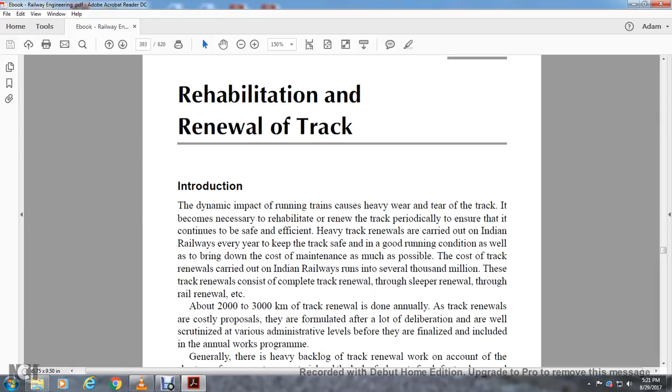These track renewals consist of complete track renewal, through sleeper renewal, and through rail renewal, covering about 2,000 to 3,000 kilometers of track renewal due annually. The cost proposal for track renewal is formulated after due deliberation and scrutiny at various administrative levels, before being finalized as part of the annual works program.

Generally, these heavy backlogs in track renewal work occur on account of shortage of permanent way material and lack of adequate funding for track renewal programs. Retaining an overaged track surface not only leads to increased cost of maintenance but also affects the safety and fluidity of traffic movement due to the delay in track renewals.

Incidents of rail fractures have been progressively increasing, and tracks have been placed under speed restrictions due to the ongoing backlog in track renewals.

Indian Railways is undertaking a massive program of track rehabilitation as part of the current plan. The backlog in track renewal will be completely cleared in the next few years.

Section 21.1: Classification of track renewal works.

Track renewal works are broadly classified as complete track renewal, which implies the renewal of all components of the track over a particular length. The necessary recoupment of ballast and provision of full ballast cushion is also done along with complete track renewal, or CTR.

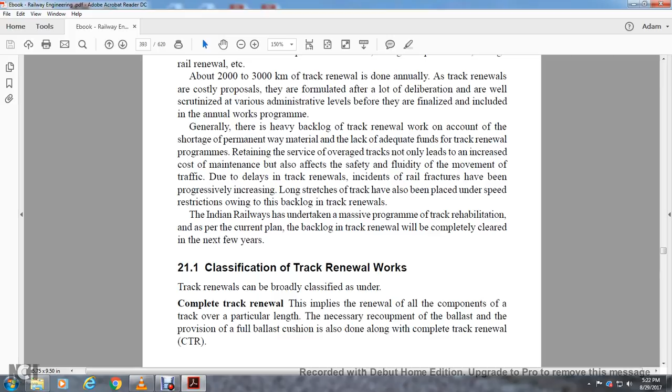Through rail renewal, or TRR, involves the renewal of all rails between one point and the next. Through sleeper renewal entails the renewal of the entire sleeper from one point to another. The necessary recoupment of ballast and provision of full ballast cushion is also done with thorough sleeper renewals.

Casual renewal implies the replacement and supply of some unserviceable rails or sleepers with serviceable rails, released rail sleepers, and similar types of items.

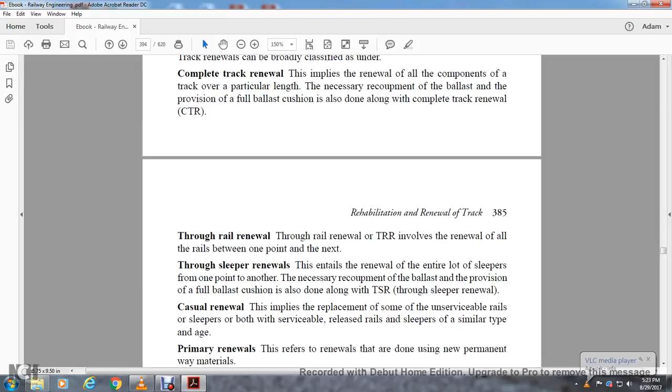Primary renewal refers to renewals done using new permanent way materials. Secondary renewal refers to renewals done using released serviceable permanent way material.

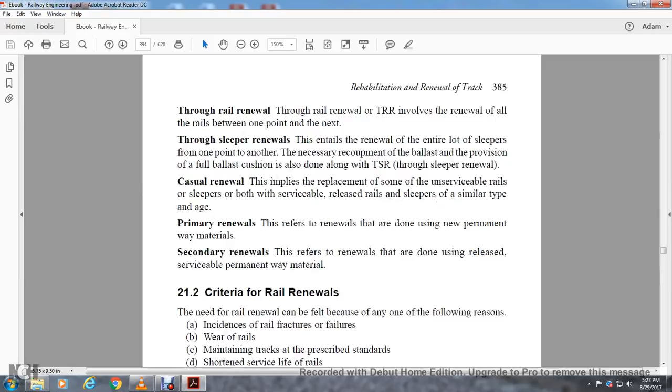Section 21.2: Criteria for rail renewal.

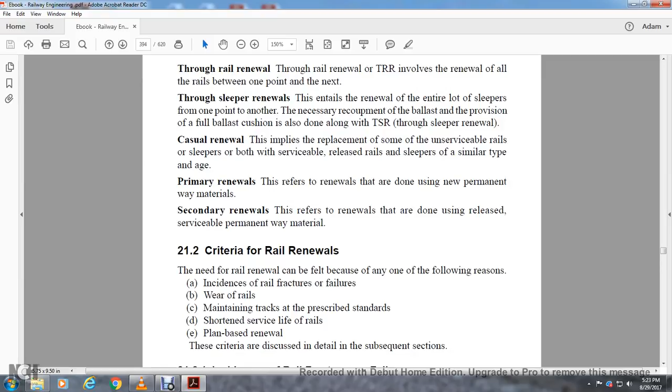Section 21.2.1: Incidents of rail fractures and failures. Since this factor has a direct bearing on safety, it should take precedence over other factors in deciding whether rail renewal is to be carried out.

A spate of rail fracture failures over a particular length of track may necessitate rail renewal. In such cases, ultrasonic testing of the rail should be carried out, and the section should be considered for rail renewal only if the fracture rate is higher than 4% in a year for a particular season, or 10% overall.

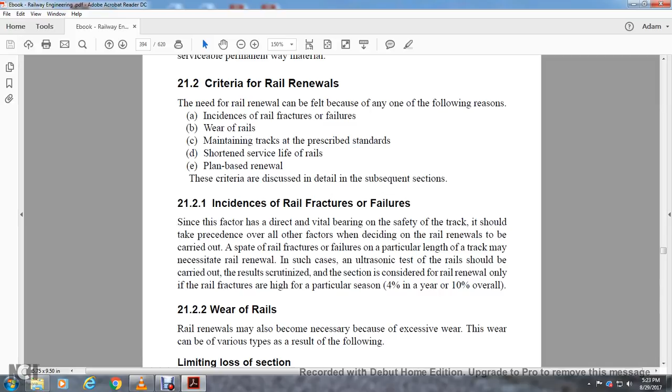Section 21.2.2: Wear of the rails. Rail renewal may also be necessary because of excessive wear, which can result from various types of wear.

Limiting loss of section: rail renewal may also be called for when the loss of rail section due to wear exceeds the prescribed limit given in Table 21.1.

In such cases, the rails shall be tested frequently using ultrasonic rail flaw detectors, because such rails are more prone to rail failures.

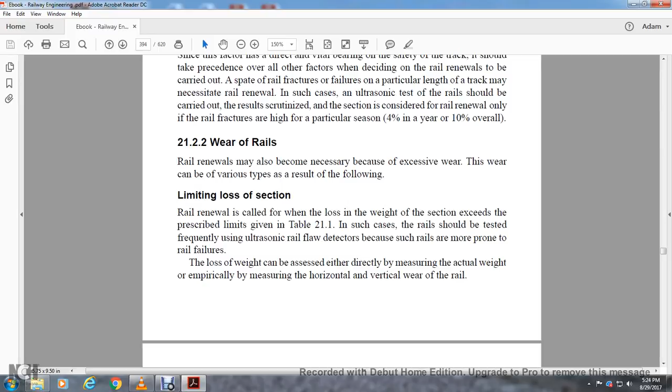The loss of section can be measured either directly as the actual weight, or empirically by measuring the horizontal and vertical wear of the rail. Table 21.1 gives the limiting loss of weight of rails.

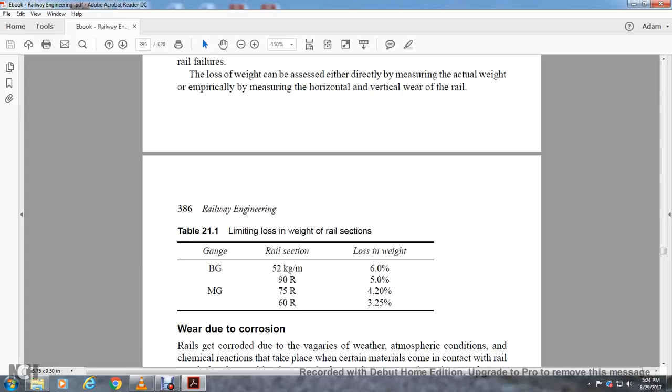For broad gauge rail sections: 52 kilogram per meter, 6.0%; 90R, 5%. For meter gauge: 75R, 4.20%; 60R, 3.25%. This is followed by wear due to corrosion.

Rails get corroded during varying weather and atmospheric conditions, as chemical reactions take place when certain materials come into contact with the rail metal, resulting in wear. Such wear is prominent in coastal areas.

Corrosion beyond 1.5 millimeters of the web or foot of the rail is specified as the criterion for rail renewal due to corrosion.

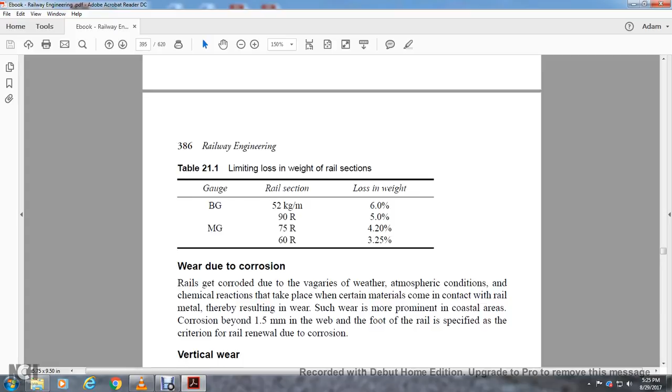Vertical wear, as shown in Figure 21.1, covers the reduction in depth of the rail head. Beyond the point where there is risk of wheel flange grazing the fishplate, rails should be renewed.

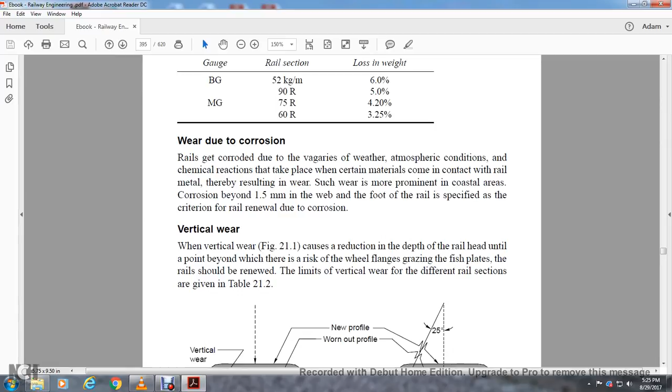The limits of vertical wear for different rail sections are given in Table 21.2. Figure 21.1 shows the vertical wear, centerline gauge face, new profile, worn-out profile, and the 25-degree vertical wear angle.

Lateral wear is measured at a distance of 13 to 15 millimeters below the top of the rail table.

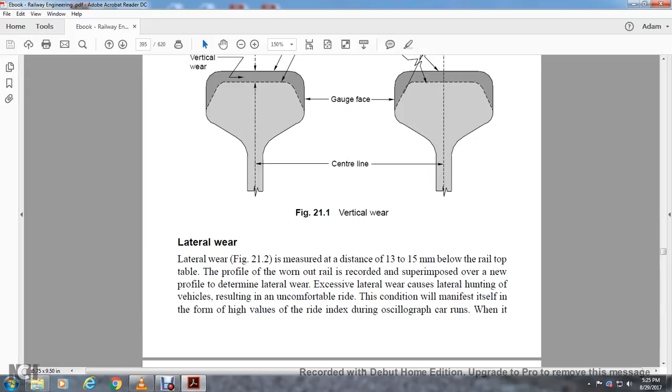The profile of the worn-out rail is superimposed over the new profile to determine the lateral wear, where excessive lateral wear causes lateral hunting of the vehicles, resulting in uncomfortable riding. This condition will manifest itself as a higher average ride index during oscillographic car runs.

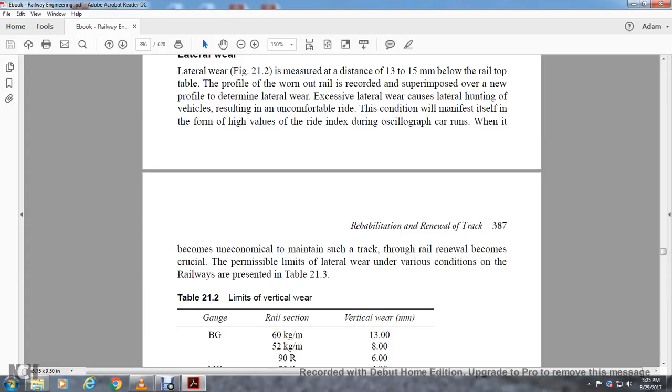When it becomes uneconomical to maintain such a track, rail renewal becomes crucial. The permissible limits of lateral wear for various conditions of rails are presented in table 21.3.

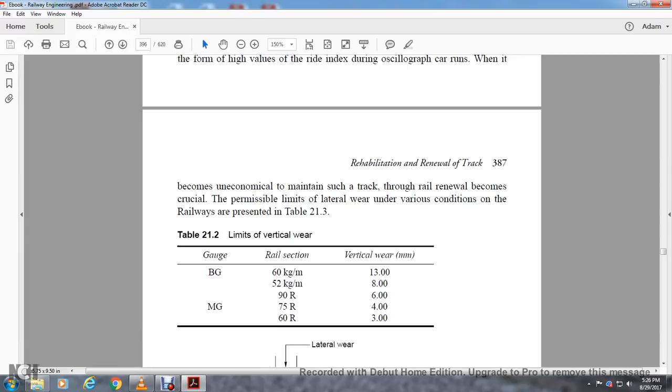Table 21.2 shows the limit of vertical wear: 60 kg/m rail - 13 mm, 52 kg/m rail - 8 mm, 90R rail section - 6 mm, meter gauge 75R - 4 mm, 60R - 3 mm.

Figure 21.2 shows the lateral wear measured from 13 to 15 millimeters below the rail table, comparing the new profile with the worn-out profile.

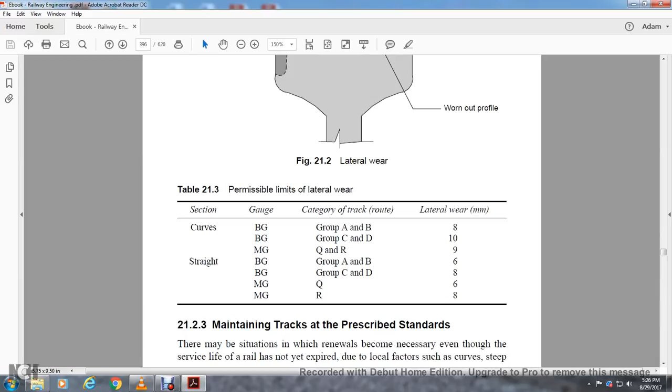Permissible limits of wear on curves: broad gauge group A and B - 8 mm, broad gauge group C and D - 10 mm, meter gauge Q and R - 9 mm. On straight track: broad gauge group A and B - 6 mm, broad gauge C and D - 8 mm, meter gauge Q - 6 mm, meter gauge R - 8 mm.

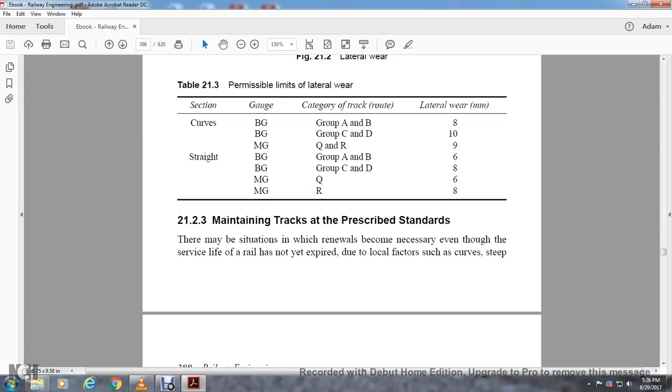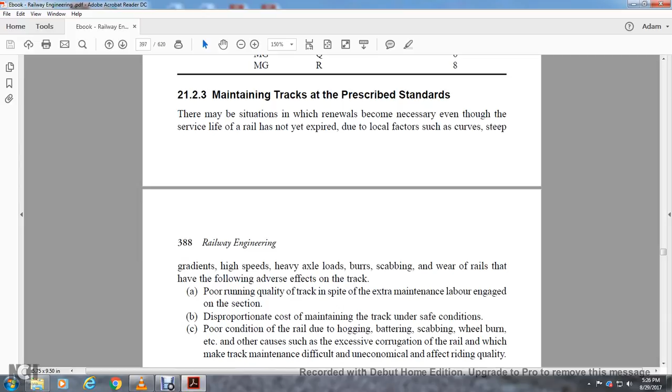21.2.3: In maintaining tracks to prescribed standards, situations arise where renewal may be necessary even though the service life of the rail has not expired, due to local factors such as sharp curves, steep gradients, high speed, heavy axle loads, burrs, scabbing, and wear of rails. These cause adverse effects on the track, poor running quality despite extra maintenance labor engaged, disproportionate cost of maintenance to keep the track in safe condition, poor condition of rail due to hogging, battering, scabbing, wheel burns, and other causes such as excessive corrugation, making maintenance difficult and riding quality uneconomical.

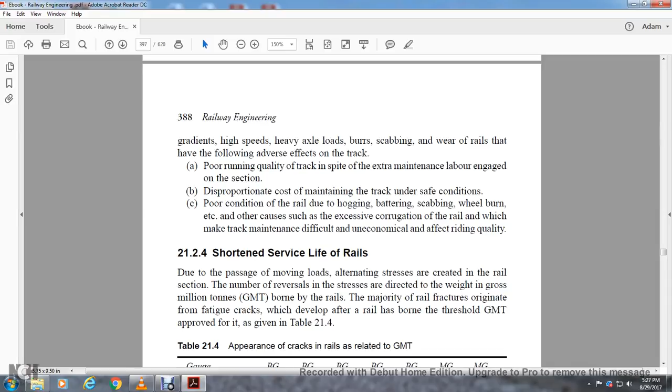21.2.4: The shortened service life of rails is due to the passage of moving loads, the alternating stresses created within the rail section, and the number of stress reversals directly related to the gross million tons (GMT) borne by the rails. The majority of rail failures originate from fatigue cracks that develop in rails as a function of the gross million tons, as shown in table 21.4.

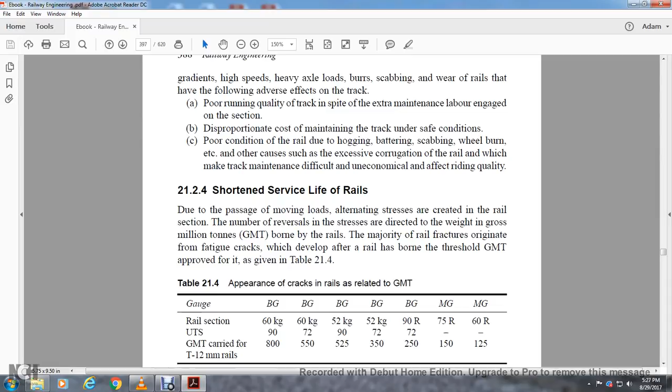Through sleeper renewal should be carried out when the percentage of unserviceable sleepers equals 30% on main lines and 35% on branch lines, as conditions warrant. The renewal criteria for each type of sleeper are explained below.

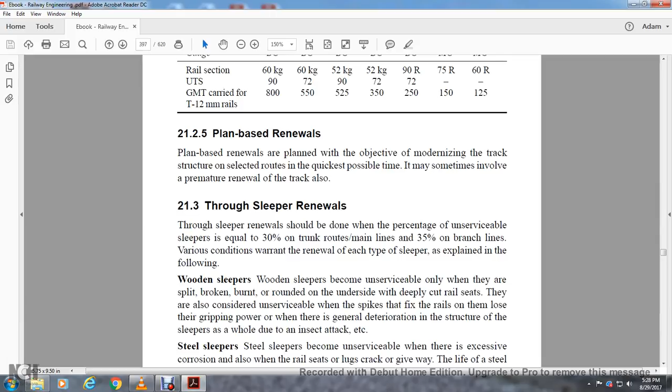Wooden sleepers become unserviceable when they are split, broken, burnt, or rounded at the underside with a deeply cut rail seat. They are also considered unserviceable when spikes become loose due to gripping power failure, or due to general deterioration of the sleeper structure caused by insect attack, etc.

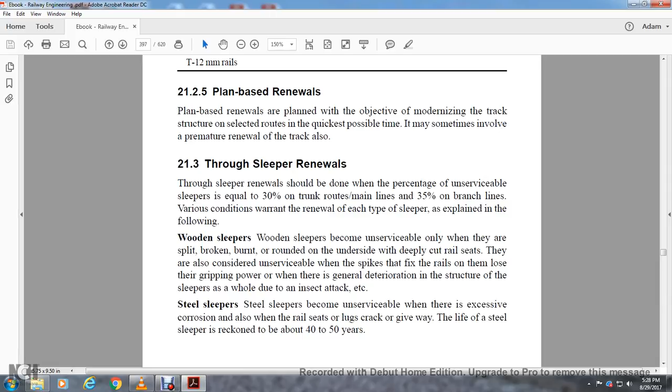Steel sleepers become unserviceable due to excessive corrosion at the rail seat, and lug cracks. The life of a steel sleeper is reckoned to be about 40-50 years.

Cast iron (CI) sleepers become unserviceable when there is excessive corrosion of the tie bar or rail seat, when the sleeper plate develops cracks, or when wear of the lug at the rail seat becomes excessive, causing the sleeper to no longer grip the rail firmly, resulting in creep. The average life of a cast iron sleeper is 40 to 50 years.

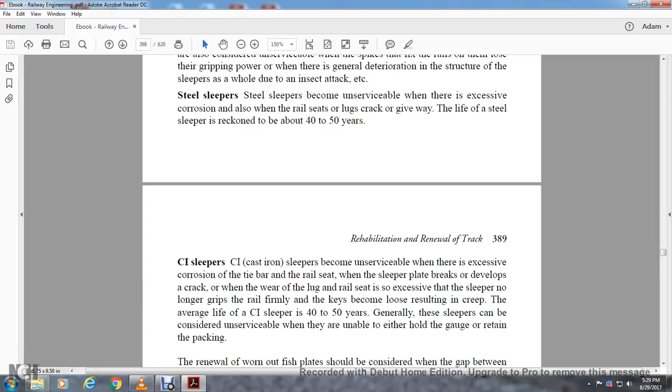Generally, these sleepers are considered unserviceable when they're unable to either hold the gauge or retain packing. Renewal of worn-out fish plates should be considered when the gap between the fish plate and the rail is 1.5 centimeters.

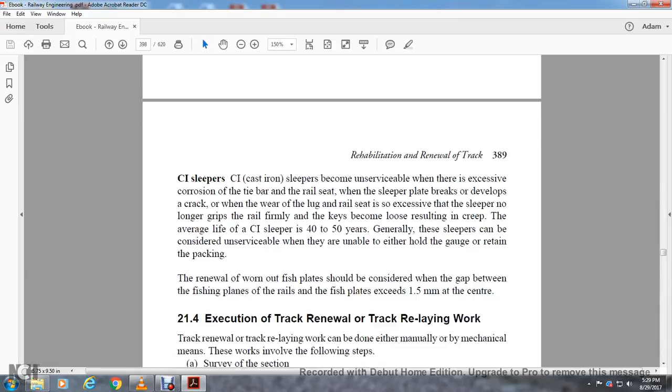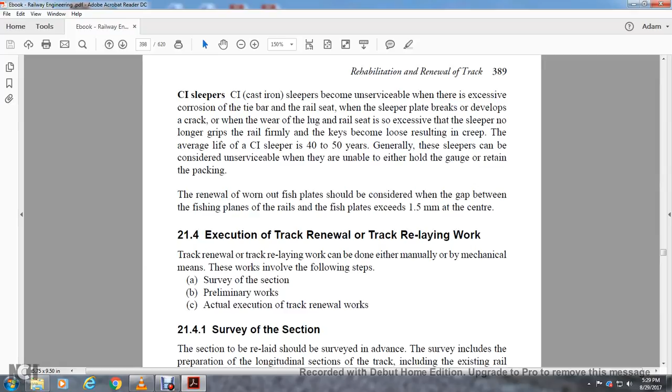21.4: Execution of track renewal and track relaying work. Track renewal and relaying can be done either manually or by mechanical means. The work involves the following steps: survey of the section, preliminary works, and actual execution of the track renewal works.

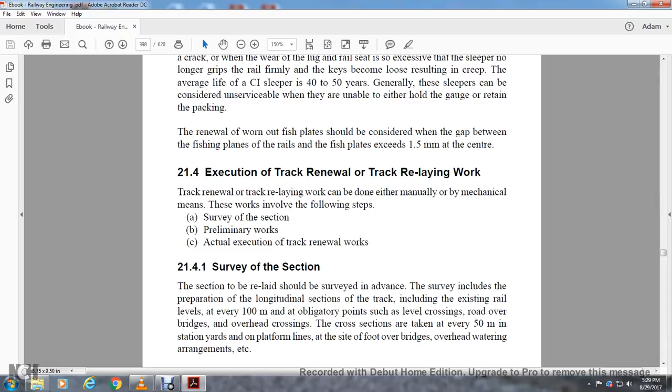The section to be relayed should be surveyed in advance. The survey includes preparation of a longitudinal section of the track, including the existing rail level at every 100 meters, obligatory positions of level crossings, road over bridges, overhead crossings, and cross-sections taken at 50 meter intervals in station yards and platforms, as well as at sites of foot over bridges and watering arrangements, etc.

21.4.2: Preliminary works.

Preliminary works are the minor works undertaken prior to the actual work involved in track renewal. The works include the following tasks: unloading track materials, ballasting the section, fixing center line and level pegs, and arranging traffic blocks. Each of these preliminary works is briefly discussed here.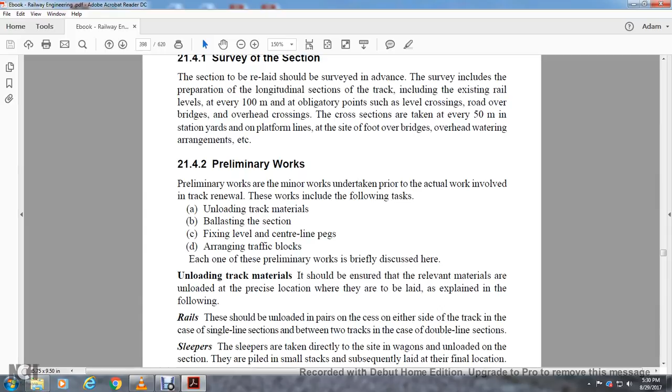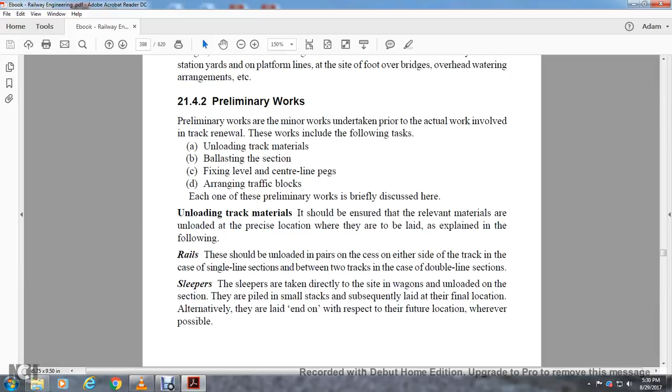Unloading track materials: it should be determined that the relevant materials are in the precise location where they are to be laid. Rails should be unloaded in pairs, with one rail for either side of the track in a single line section, and between the two tracks in the case of a double line section. Sleepers are taken directly to the site in wagons and unloaded along the section. They are piled in small stacks, subsequently laid in the final location, or alternatively laid end on with respect to the future location whenever possible.

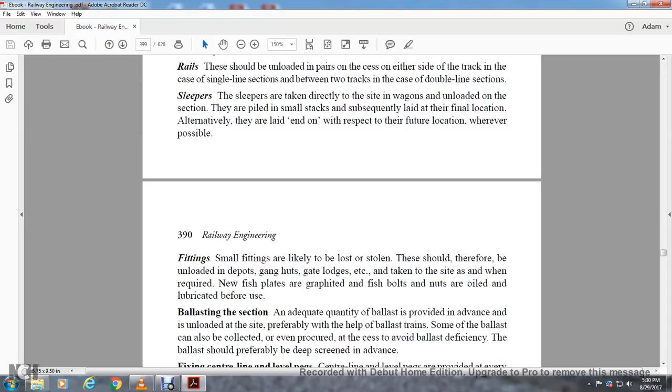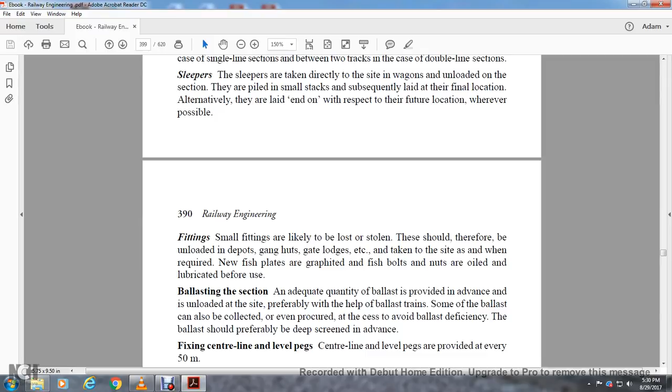Ballasting the section: an adequate quantity of ballast should be unloaded in advance, preferably with the help of a ballast train. Some of the ballast can also be procured at site to avoid any deficiency. Ballast should preferably be deep screened in advance.

Fixing center line and level pegs. Center line and level pegs are properly provided every 50 meters.

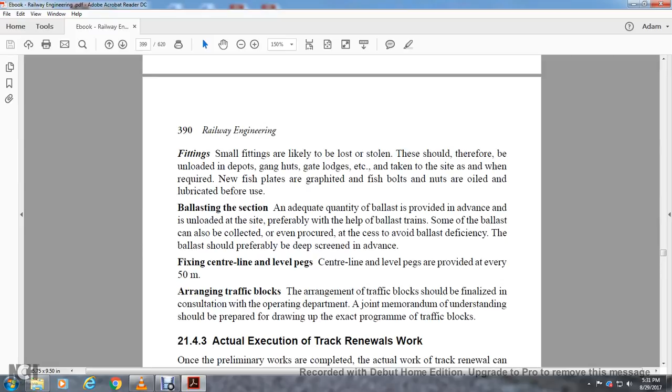21.4.3 Actual execution of the track renewal works. Once preliminary works are completed, the actual work of track renewal can start, involving the following tasks: setting up the traffic block for 2 to 4 hours in order to execute the work of track relaying.

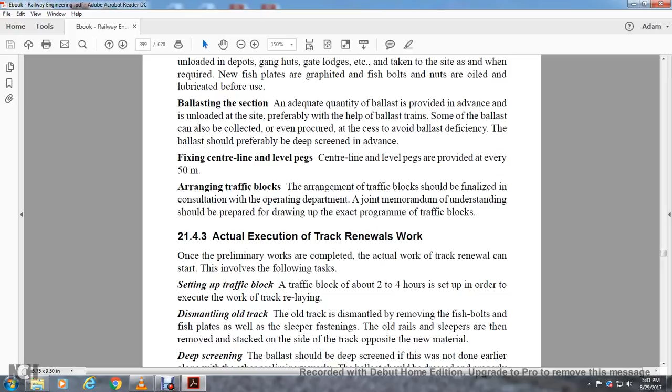Deep screening the ballast should have been done earlier along with the preliminary works. The ballast should be dressed and properly leveled in accordance with the correct profile.

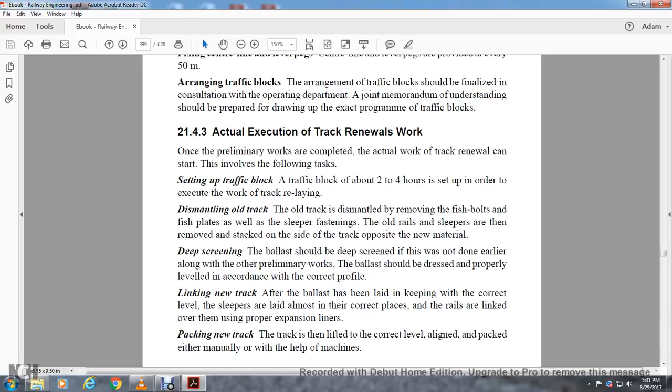Linking the new track: the ballast having been laid while keeping the correct level, the sleepers are placed in the correct position, and the rails are linked over them using the proper expansion liners. Packing new track. The new track is then lifted to the correct level aligned, and packed, either manually or with the help of machines.

21.4.4 Progress or output: on average, renewal of 4/10 of a kilometer of track is achieved in 15 to 30 gangs during a 3 to 4 hour traffic block. Deep screening of the ballast should however be completed after the relaying work.

21.4.5 Rail Dolly: the rail dolly is an equipment used for quick and easy transportation of rails. It consists of a tubular frame fitted with a chain at the end for rail clamping. There are 2 double flange wheels with ball bearings which run on the rails. A leverage handle is available for operating the movement of the rail.

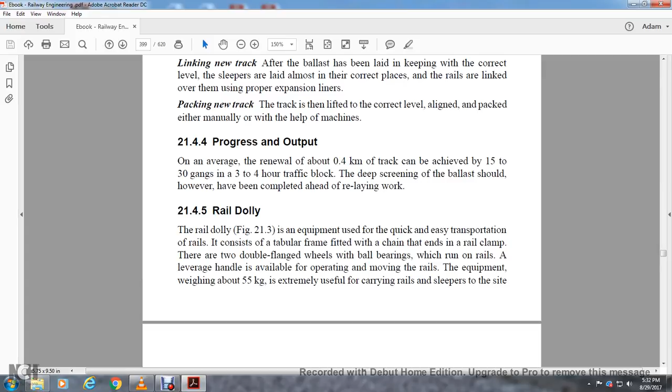The equipment weighs 55 kilograms and is extremely useful for carrying rails and sleepers to site. If the work is halted due to an approaching train, the rail dolly equipment can be cleared off the track in 10 seconds.

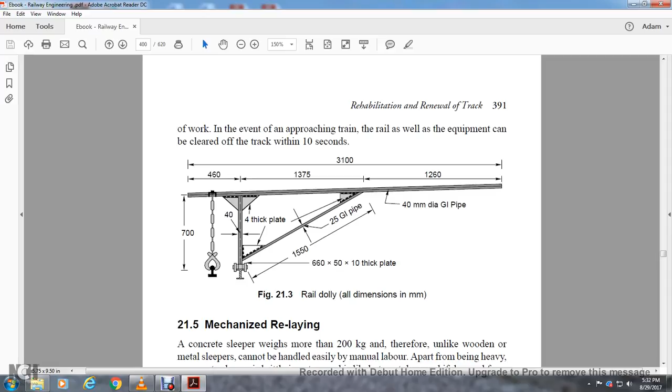This shows the rail dolly, the plate, the 25 GI pipe, and the 40 millimeter diameter GI pipe, used for mechanized rail relaying.

Concrete sleepers weigh more than 200 kilograms, therefore unlike wooden or metal sleepers, they cannot be easily handled by manual labor. Apart from being heavy, concrete sleepers with a brittle nature are likely to be damaged if dropped from some height or handled roughly.

The conventional method of relaying, which employs manual labor, is quite slow and the quality of work done is not always very good. The need for mechanized relaying has been increasingly felt on account of these limitations, particularly in view of large-scale use of concrete sleepers in Indian Railways.

Mechanical relaying can be done by either of the following methods: semi-mechanized relaying using prefabricated panels, meaning the relaying is done with mechanical help through a Plasser quick relay system, with other minor work done manually; or fully mechanized relaying with the help of track relay trains.

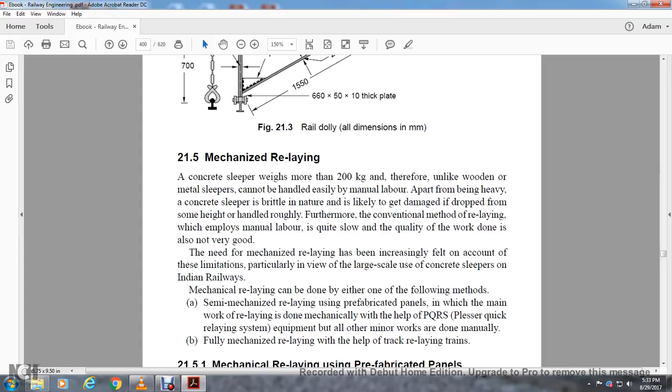21.5.1. Mechanized relaying with the use of prefabricated panels: in Indian Railways, mechanical relaying is mostly done with the help of the Plasser quick relay system. The equipment is manufactured by the Austrian firm Plasser and Theurer, in a factory near Faridabad, India. The equipment basically consists of 2 self-propelled portal cranes, each capable of lifting 5 to 9 tons, running on an auxiliary track of 3.4 meter gauge.

The track panel, consisting of concrete sleepers and rail fittings, is prefabricated at a base workshop for the relaying of the track.

The prefabricated panels loaded in special BFR type wagons are taken to the worksite along with the portal cranes. BFR is the classification scheme of the freight wagons of Indian Railways. B indicates bogie wagon, F indicates flat car, and R indicates forced discharge.

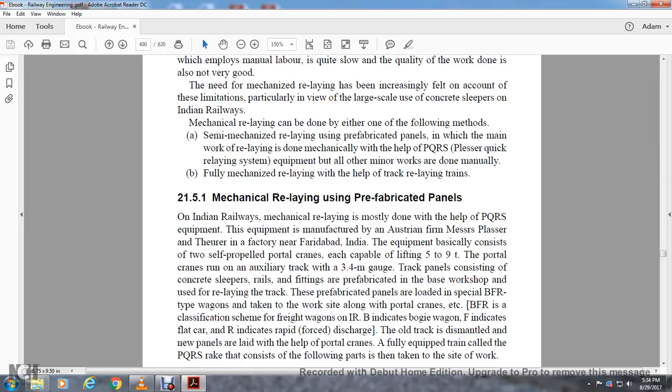The old track is dismantled, and the new panels are laid with the help of portal cranes.

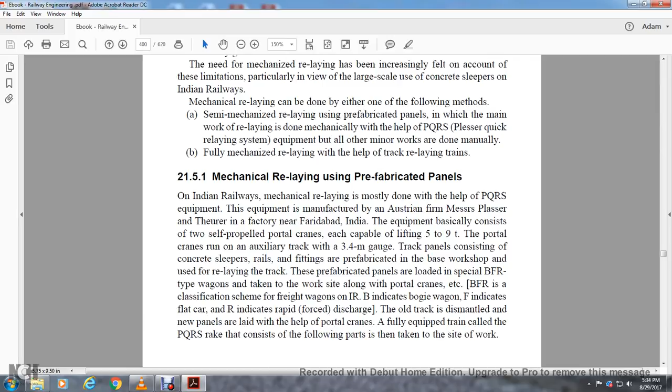Fully equipped, the train can carry the Plasser quick relay system, consisting of the following parts, taken to the site of work: engine and coal wagon for recoupment of coal in the engine; the crew rest van for the staff to stay and rest; the guard compartment for controlling movement of the train; and a mobile workshop-cum-rest van for urgent repairs to be done on site.

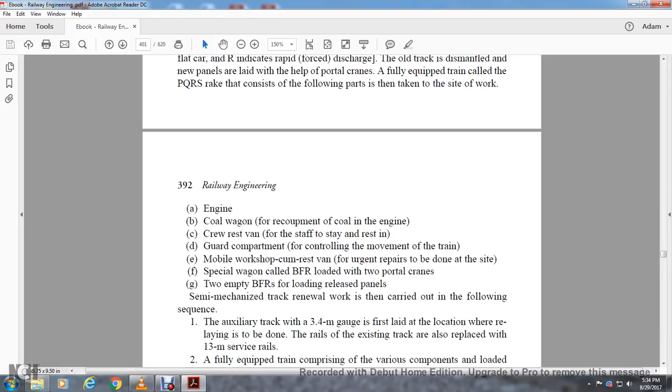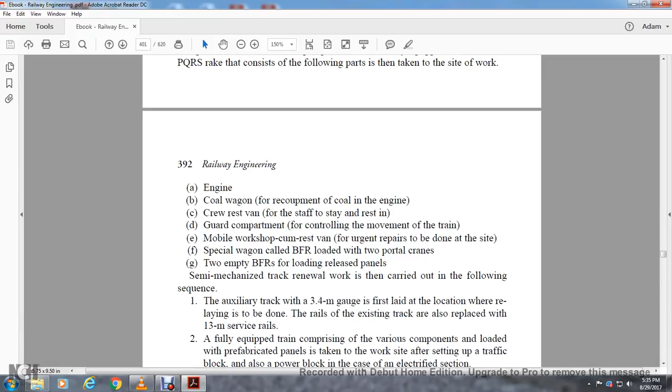Special wagon of the BFR type, which is bogie flat car with rapid discharge, loaded with two portal cranes - two empty bogie flat cars for loading released panels.

Semi-mechanized track renewal work is carried out in the following sequence. The auxiliary track of 3.4 meter gauge is first laid in the location where relaying is done. The rails for the existing track are also replaced with 13 meter service rails.

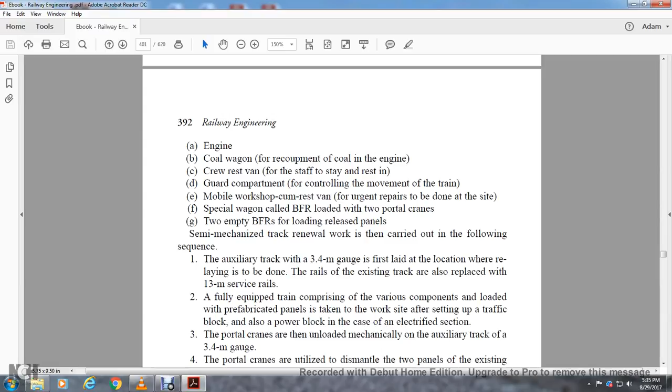A fully equipped train comprising various components loaded with prefabricated panels is taken to the worksite with the setting of the traffic block and power block, in case of electrical sections.

The portal cranes are then unloaded mechanically onto the auxiliary track on the 3.4 meter gauge. The portal crane is utilized to dismantle the panels of the existing track and load them onto the empty bogie flat car relay.

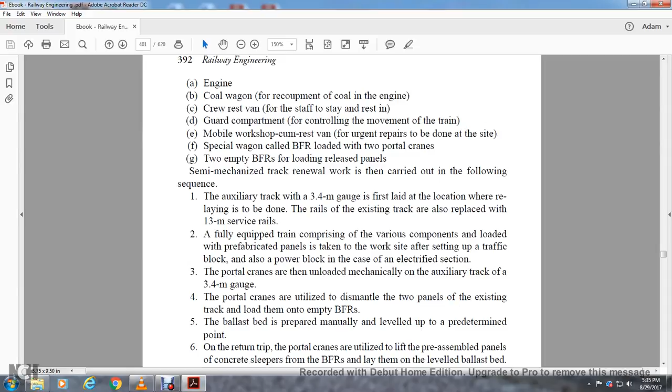On the return trip, the portal cranes lift the pre-assembled panel from the bogie flat car relay with the leveled ballast.

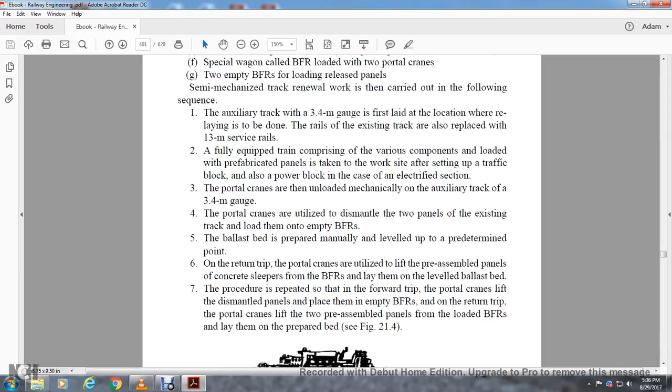The procedure repeats: on the forward trip, the portal cranes lift the dismantled panels and place them in the BFRs, and on the return trip, the portal cranes lift the pre-assembled panels from the loaded BFRs onto the prepared bed.

This shows the portal crane lifting the concrete sleeper panels.

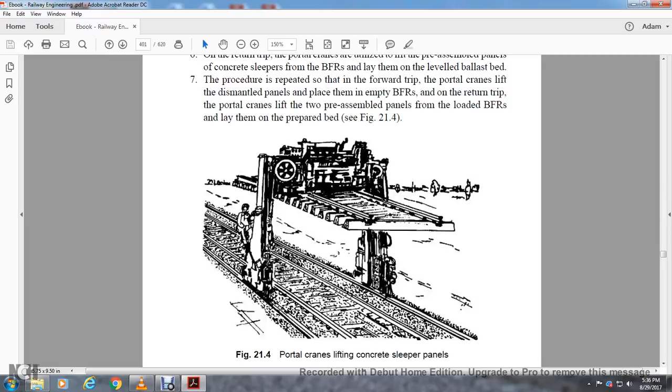The new panel of concrete uses the fish plate with fittings as the fastening method. This relaying quick and independent method is best suited for Indian conditions, making it possible to achieve an average output of 200 meters per effective hour of work, with 0.8 kilometers of relaying accomplished in a 4-hour block.

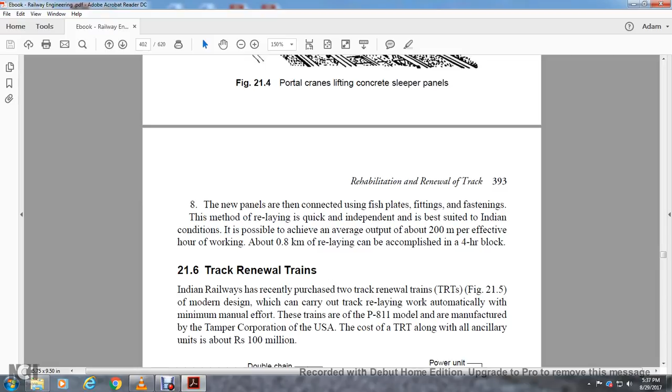Section 21.6: Track Renewal Train. The Indian Railways have purchased two track renewal trains, the TRTs, shown in figure 21.5. These are of modern design, carrying out track relaying work automatically with minimal manual effort. These trains are the P-811 model, manufactured by the Tamper Corporation of the USA. The cost of the track renewal trains, along with ancillary units, is about Rs 100 million.

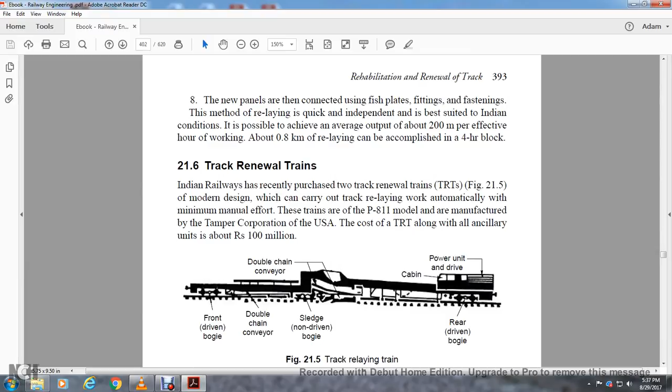The track relaying train consists of a front-driven bogie, a double chain conveyor, a sledge, a non-driven bogie, a cabin, a power unit drive, and a rear-driven bogie. This is the structure of the track relaying train.

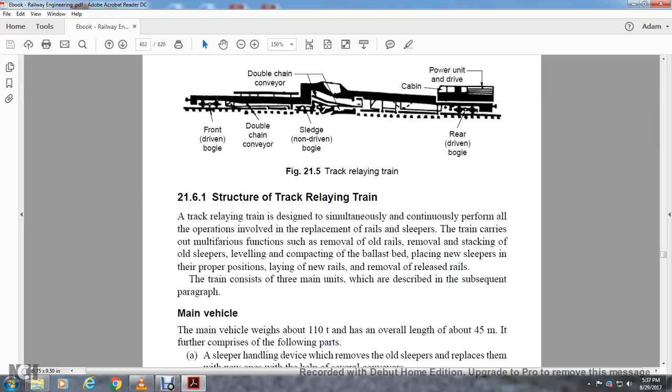The track relaying train is designed to simultaneously perform all operations involved in replacing the rails and sleepers, carrying out multifarious functions: removal of old rails, removal and stacking of old sleepers, leveling and compacting the ballast bed, placing new sleepers in proper position, laying new rails, and removal of released rails. The train consists of three main units, described in the following paragraphs.

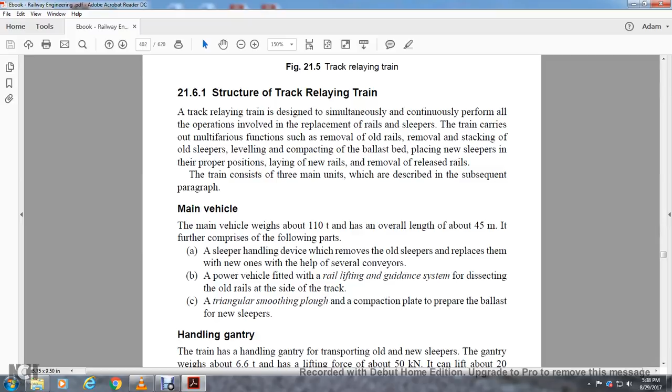A compacting plate prepares the ballast for the new sleepers. The handling gantry of the train transports old and new sleepers. The gantry weighs about 6.6 tons, has a lifting force of about 50 kilonewtons, can lift about 20 concrete sleepers at a time, and can travel at a maximum speed of 15 kilometers an hour.

This shows details of the main vehicle of a track relaying train: the intermediate storage area, the double chain conveyor, the old sleeper pickup, ball joint, central rail guidance, sleeper laying system, laying frame, and set of BFRs.

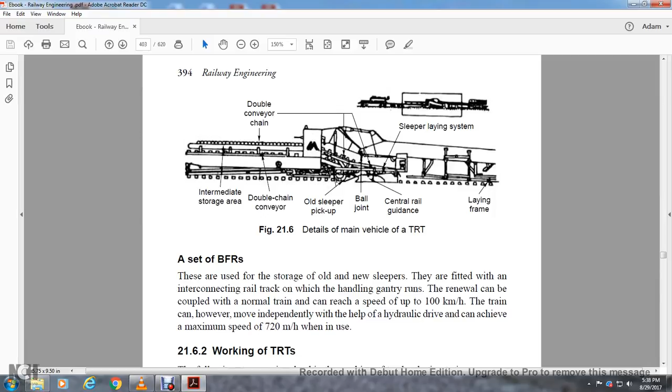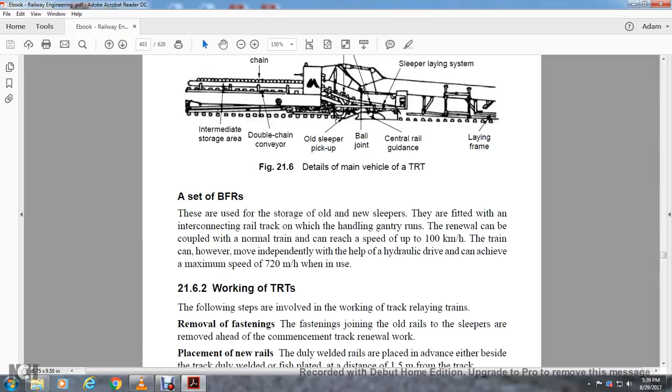The renewal train can be coupled with a normal train and reach speeds up to 100 kilometers an hour. The train can move independently with the help of a hydraulic drive, achieving a maximum speed of 720 meters an hour when in use.

Working of the track relaying trains involves the following steps: removal of the fastenings joining the old rail to the sleepers, removed ahead of the commencement of track renewal work.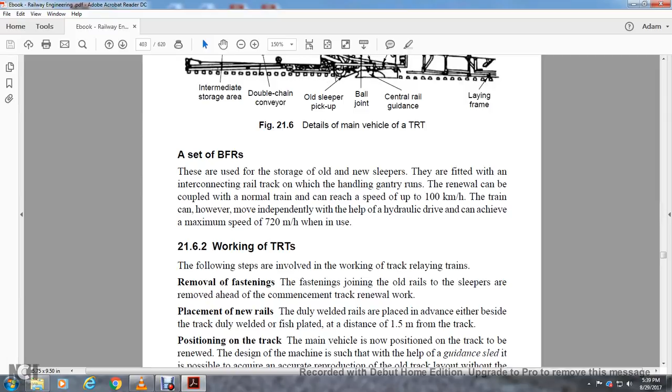Placement of the new rails: duly welded rails are placed in advance beside the track, duly welded or fish plated at a distance of 1.5 meters of the track.

Positioning of the track: the main vehicle is now positioned on the track to be renewed. The design of the machine is such that, with the help of the guidance sled, it is possible to achieve accurate reproduction of the old track layout without the aid of an external guidance system.

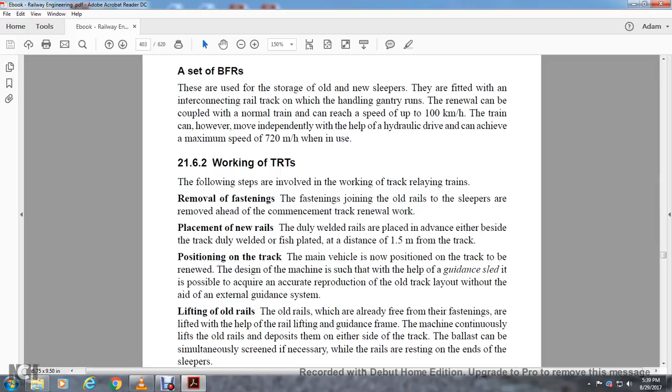Lifting old rails: the laid old rails are freed along with the fastenings and lifted with the help of the rail lifting and guidance frame. The frame, with the mechanism for continuous lifting of the old rails, deposits them on either side of the track. The ballast can be simultaneously screened as necessary, while the rails are resting on the ends of the sleepers.

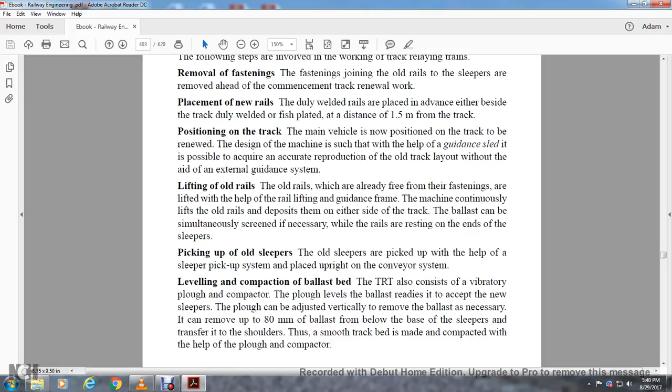Leveling and compacting the ballast bed: the track renewal train system consists of a plow and compactor plow to level the ballast, making it ready to accept new sleepers. The plow can be adjusted vertically to remove ballast, and if necessary it can move up to 80 millimeters of ballast from below the base of the sleeper and transfer it to the shoulders. Thus a smoother track bed is made with the compacting help of the plow and compactor.

Laying of the new sleepers: the new sleepers are already stacked in wagons. They are automatically placed at a specified distance using a wheel of definite diameter. Due to the unique geometry of the mechanism, the system ensures sleepers are laid squarely at the specified distances.

Laying of the new rails: new rails, already positioned along the track, are lifted and placed in the appropriate position on the sleepers. The equipment is designed so that the minimum stress in the rails is maintained while they are being lifted.

Fixing of insulators, elastic rail clips, and elastic rail insulators is done to the rails with the help of a small mechanical appliance. These items are normally carried in separate wagons.

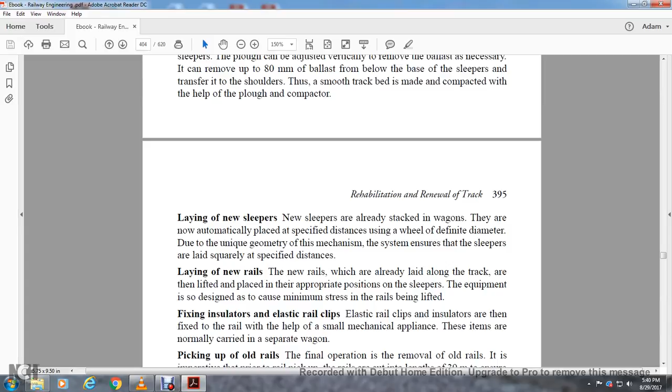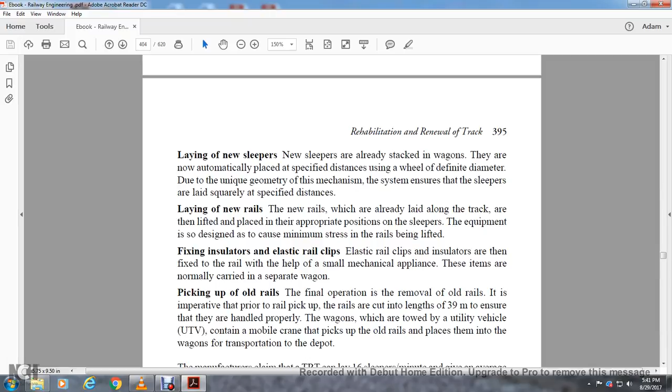Manufacturers claim the track renewal train can lay 16 sleepers a minute, giving an average output of 300 to 400 meters an hour. An average traffic block of 4 hours per day is expected, and the train will give an average output of 200 to 250 kilometers per year.

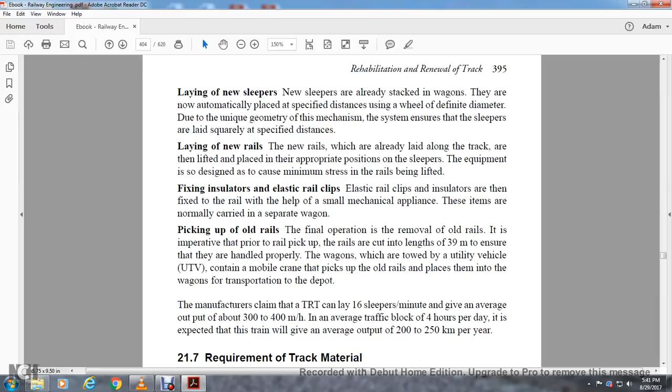Requirement of the track materials: it is important that the exact quantity of track materials is conveyed to the site. Excess material could get wasted, while a shortage of material would result in difficulties, delaying the carrying out of the new renewal work. It is normally desired to have a small spare stock of extra material ready for unforeseen contingencies. The exact quantity of material required for 1 kilometer of track is calculated as given below.

Track of ST sleepers, track of 52 kilogram rails. The sleeper density is M plus 7, where M is the length of the rail in meters, normally 13 meters, for broad gauge. The calculation is shown as follows.

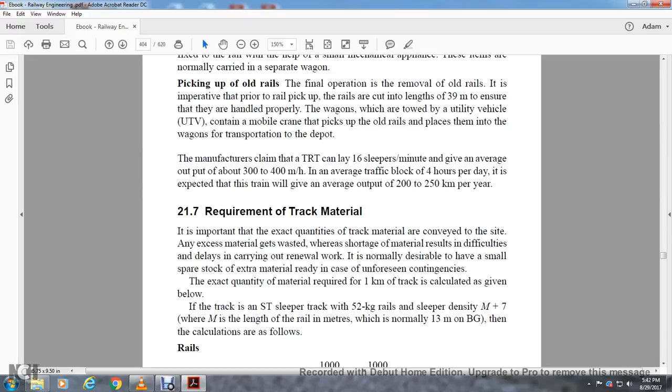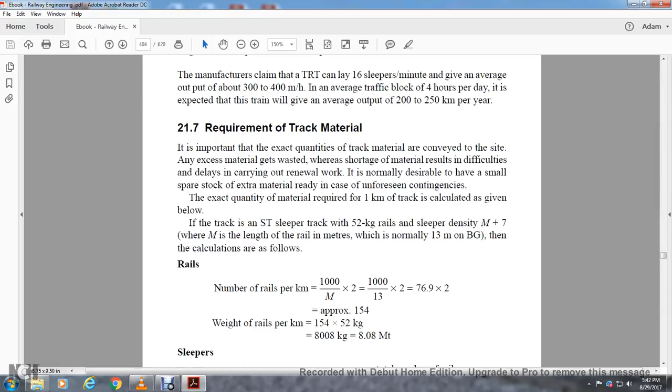Number of rails per kilometer equals 1,000 divided by the length in meters, times 2, equals 1,000 divided by 13, times 2, which is 76.9 times 2, approximately 154. Weight of the rails: 154 times 52 kilograms equals 8,008 kilograms, 8.08 metric tonnes.

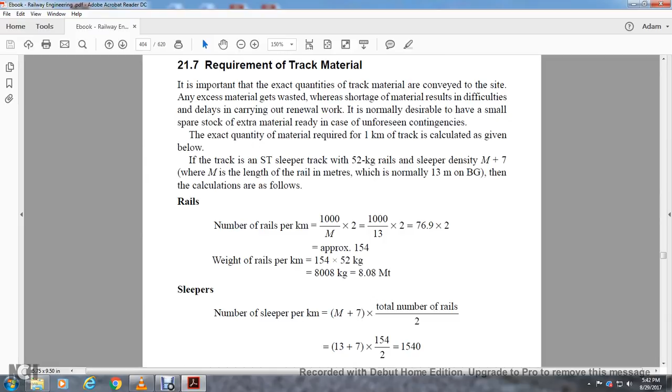Number of sleepers per kilometer: length in meters plus 7, total number, times the total number of rails, divided by 2. 13 plus 7, times 154, divided by 2, equals 1,540.

Total number of rails: each joint requires 4 fish bolts. Number of fish bolts equals 4 times the number of rails per kilometer: 4 times 154 is 516.

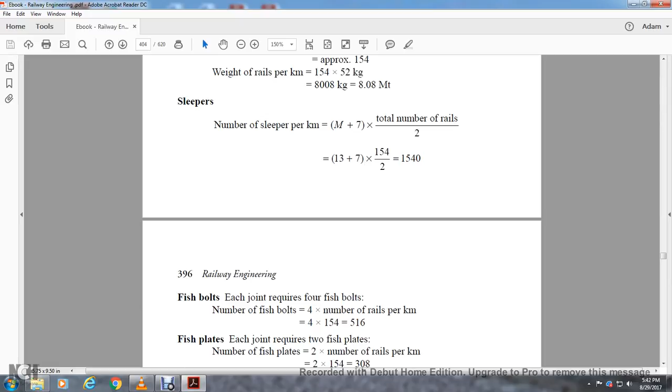Each joint requires 2 fish plates. The number of fish plates equals 2 times the number of rails per kilometer: 2 times 154 is 308.

4 keys are required per sleeper. The number of keys equals 4 times 1,540, which is 5,160. Similarly, 4 loose jaws are required per sleeper. The number of loose jaws equals 1,540 times 4, which is 5,160.

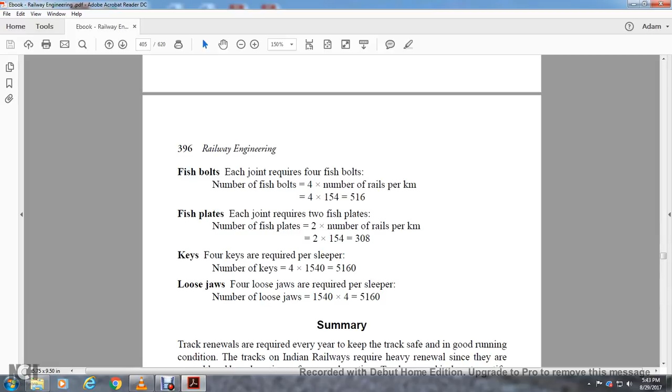Track renewals are required every year to keep the track safe and in good running condition. Indian railways require heavy renewal since the tracks are very old and have been in use for a very long time. Track renewals are done to rectify defects in rails, fish plates, and sleepers.

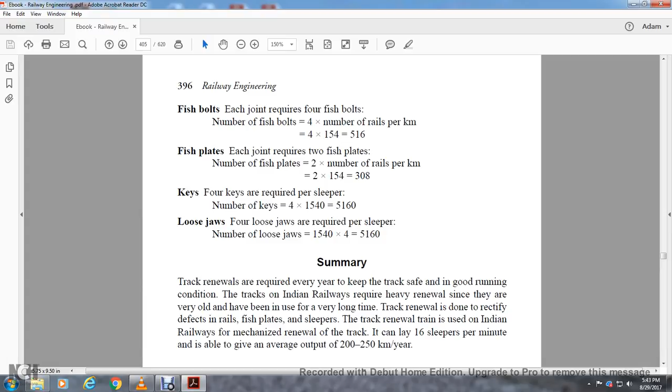The track renewal train is used in India for mechanized rail renewal of the track. It can lay up to 16 sleepers per minute and is able to give an average output of 200 to 250 kilometers per year.

Chapter 22: Rail Accidents and Disaster Management.